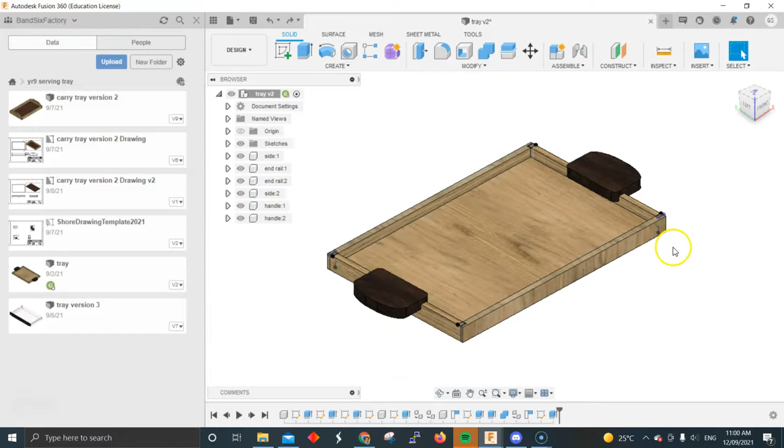We're going to end up making something like this in Fusion with a base, sides, and handles. So I'll start a new drawing here, so I'm going to close that one. I've actually made a few different versions here. We'll start out by creating a few different components.

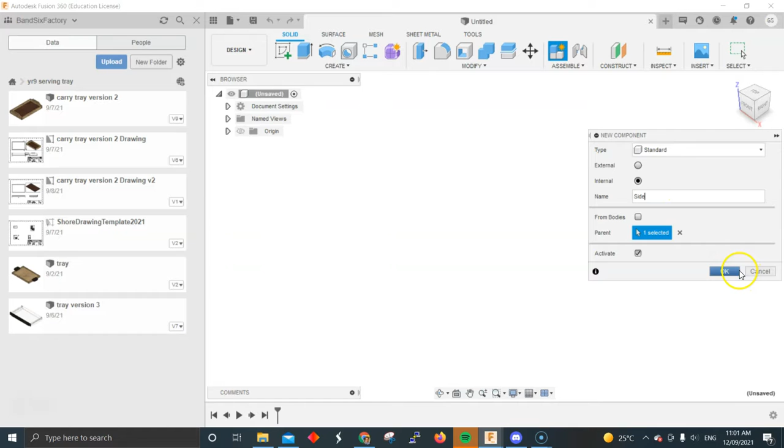So in here, let's create a new component to start off with, and we'll call this component 'side'. Okay, and go OK. So we've created a side piece. Then we can just start out by sketching it out. So I'll create a sketch on the front view here, and we know it's 480 long and 30 high.

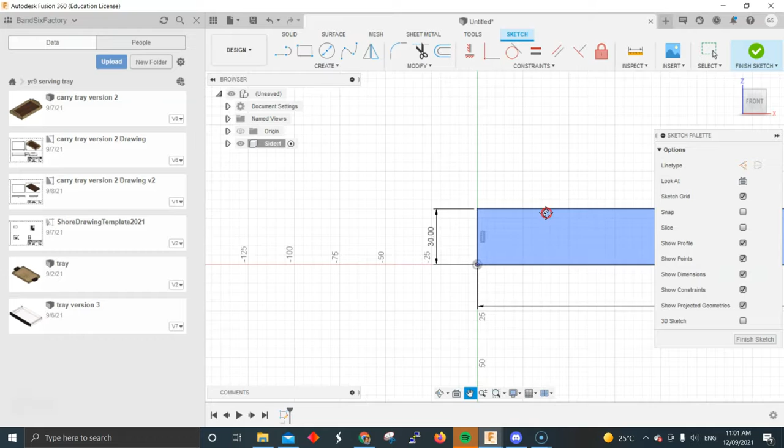So I can just type in 480 long and hit the tab button, 30 high, and press enter. That's the first part. Now what we need to do, we'll extrude that out by just clicking on finish sketch and going to the extrude button. We need to extrude it out by 12 millimeters, so we'll just type in 12 and then press enter. So we're starting to get to our first piece here.

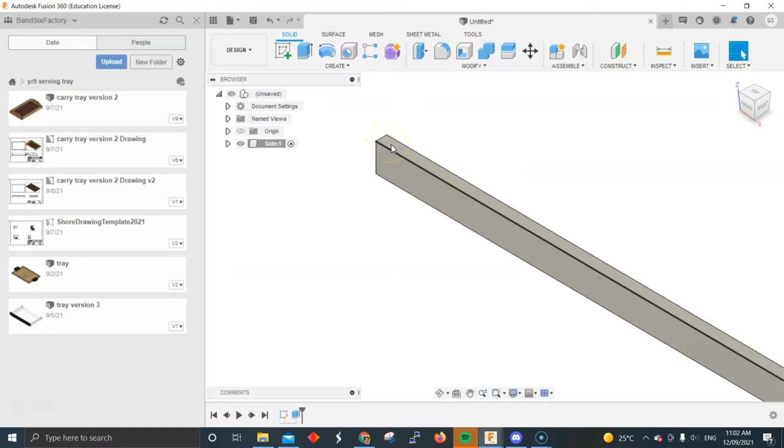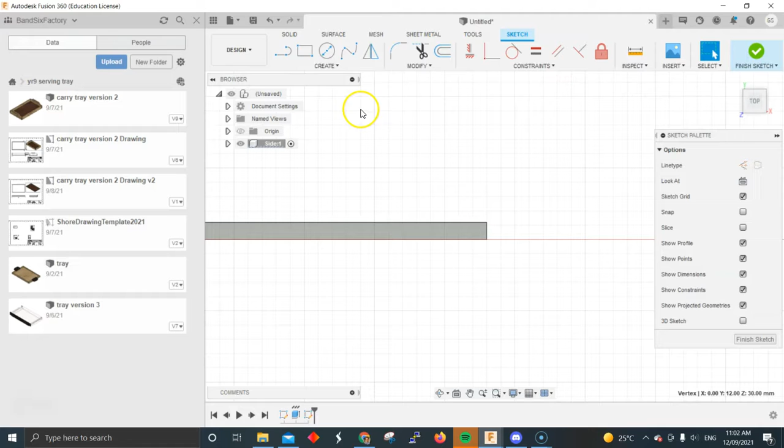So let's just have a look at this in isometric. Now what we need to do, we can create a new sketch on the top surface, and we can then do our rebate joints in there. I'm going to zoom in on one corner here and click on the corner, and we'll make that 12 millimeters by 6 millimeters deep, because we need to go halfway in. And we can do the same at the other end, so we'll click on that corner, 12 millimeters, tab, 6, and then press enter.

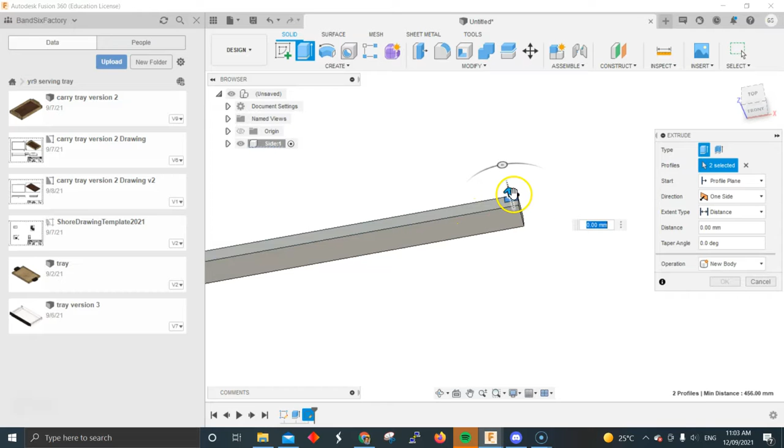We'll finish that sketch now and zoom out. What we can actually do, we'll rotate around so we can see it. I'm going to hit the extrude button, click on that one, and we'll click on that one there, and we'll drag it through to do a cut. So we've created our first piece here, which is good.

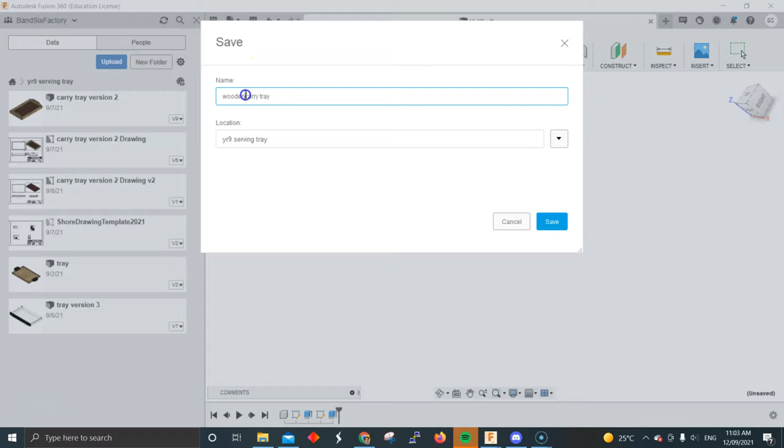Now let's go back into our top document here, into this top level. We can next save it. Let's just go into save and we'll click save. Let's just call this 'wooden carry tray'. We save it in our yr9 serving tray folder. So I've created a folder here, and we've got our first piece saved in.

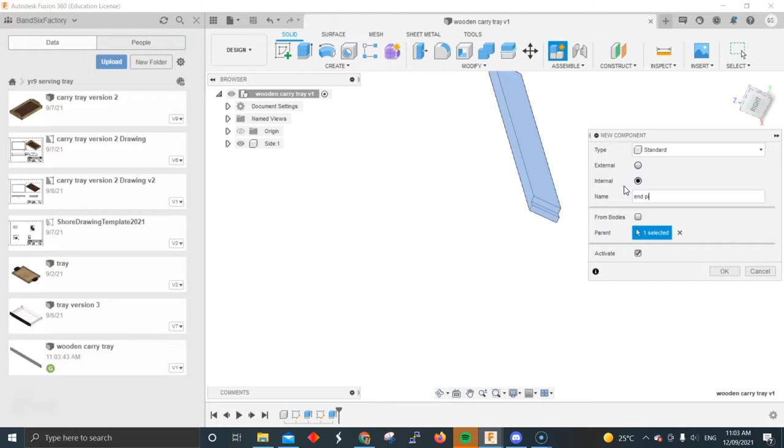Next thing, what we can do, we'll draw another sketch off that, create a new component, and create another sketch off that. So let's create a new component, and we'll tell it where to draw it from. Well actually first we'll call it the 'end piece'. Then it'll ask us where we want to start our sketch, so let's create a new sketch, and we'll do it on that face there.

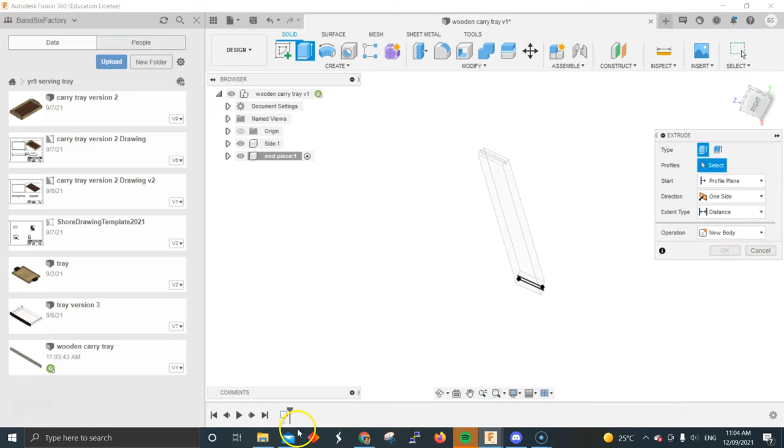We'll pick up the dimension, or pick up the drawing behind. So we know that's 12 by 30, and we can finish that sketch and extrude that out. We need to make that length - let's drop back into the drawing here, into the other sheet. So it needs to be, the end rail is 312 long. Okay, so minimize that, and we know that it's going to be 312.

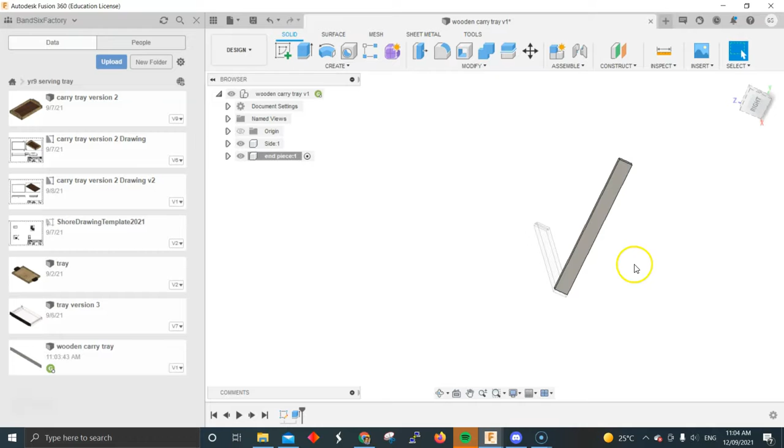So let's extrude that out by a distance. We're going to select it, extrude, typing 312, press enter. So that's our end piece, which is good. Okay, and now we'll press go back to the main drawing up the top here and go OK.

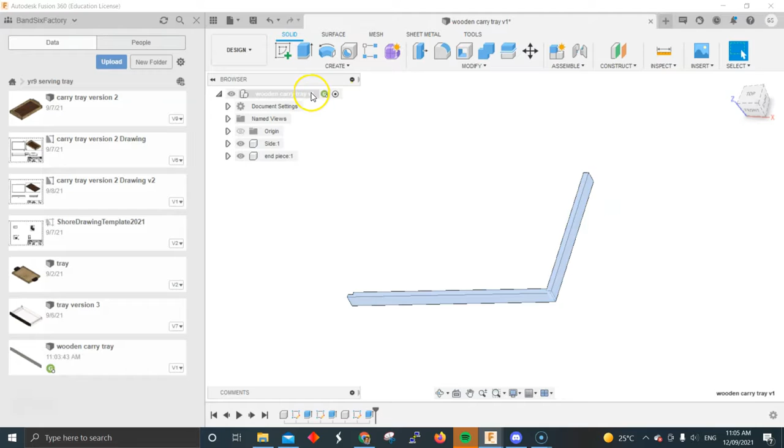Now what we can actually do, we need to copy these parts out. So let's first of all go into the end piece here and actually just click on edit. We'll copy that. Okay, and then knowing that we're in the top level here, we can then right click and we can actually paste new - you can't do a paste new.

If you're inside of this one here, it won't show up. You can't do a paste new, it won't allow you to do it inside of that. You have to go back up to the top one and then go down to paste new. So we paste a new one and we're going to drag that out.

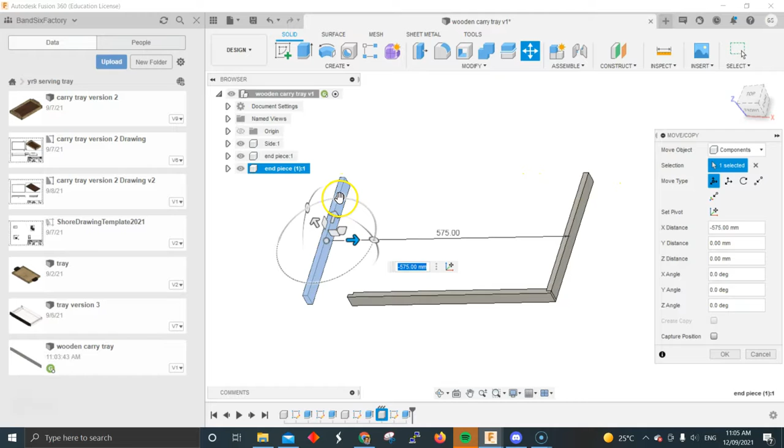But we have to rotate this, and there's a reason why, and you're going to learn about this later on. We'll rotate that around 180 degrees and just go OK. Then we're going to click on this one here, the side piece. So we're going to copy that, make sure in the top layer, and go paste new. We'll drag that one out and we're going to rotate that around 180 degrees

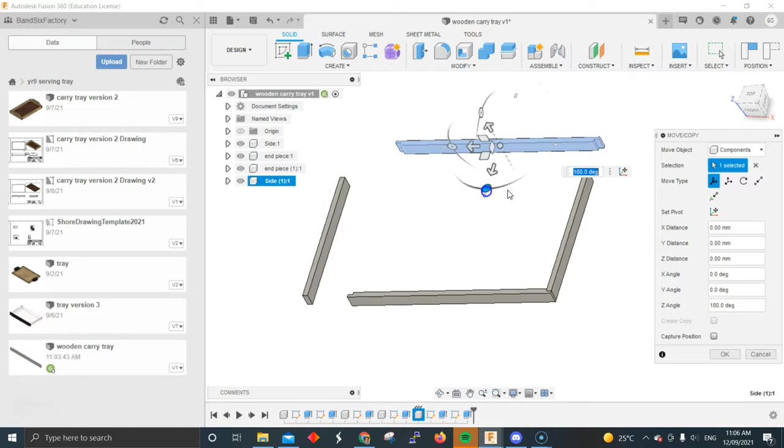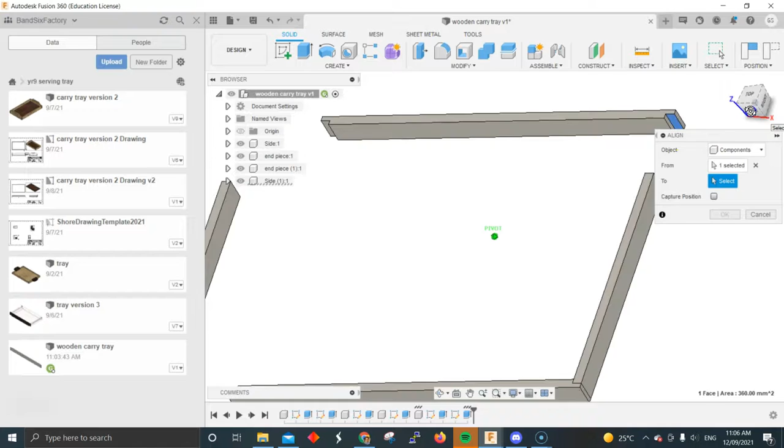And go OK. Now, next thing, what we want to do, we want to align them. There's a few different ways to get this to join together. So the easiest way is to use the align tool at the moment. We're just going to use the align tool and select, we want this surface to join onto. I'm just going to go around and we want it to join onto that end piece there. So let's just click on that and align that.

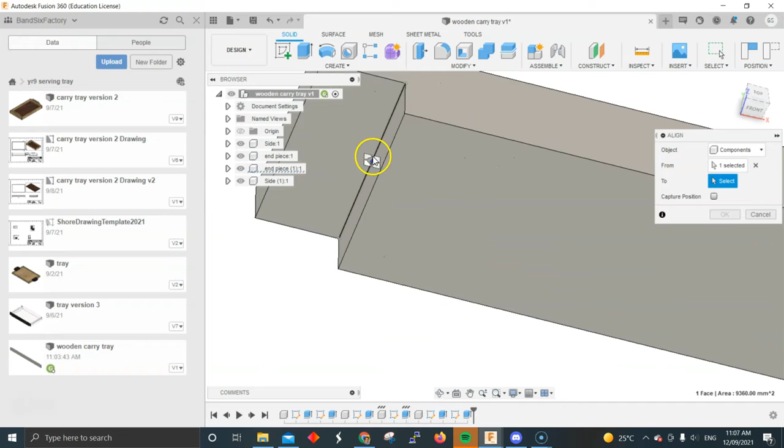Now the next one we want to do is align. We're going to go back up, modify, align again. We're going to click on this surface and we want it to join onto this end piece here, onto this area here. So we're just going to click on that. So we've joined that together and go OK. So that's pretty well sorted out.

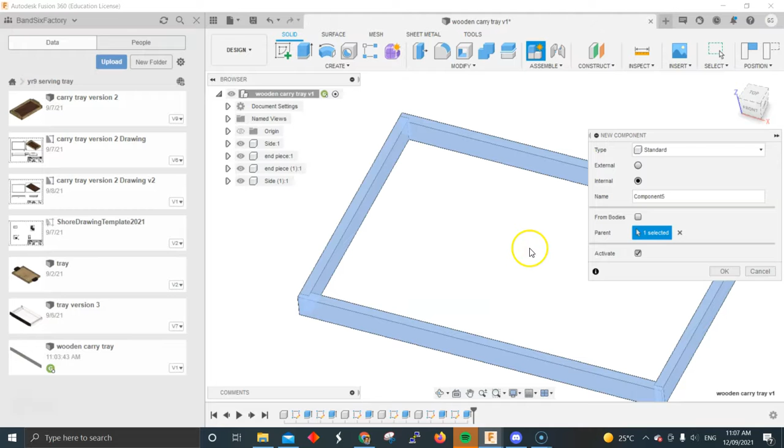Now, next thing, we want to create a base piece. So we've now got 4 independent pieces here. Okay, so we'll create a new document here. We're just going to go up and go create a new component, and we're going to go to the bottom of the tray here. So let's click around the bottom, and we're going to name that the base. Okay, and click OK. And we need to then create a sketch on the surface.

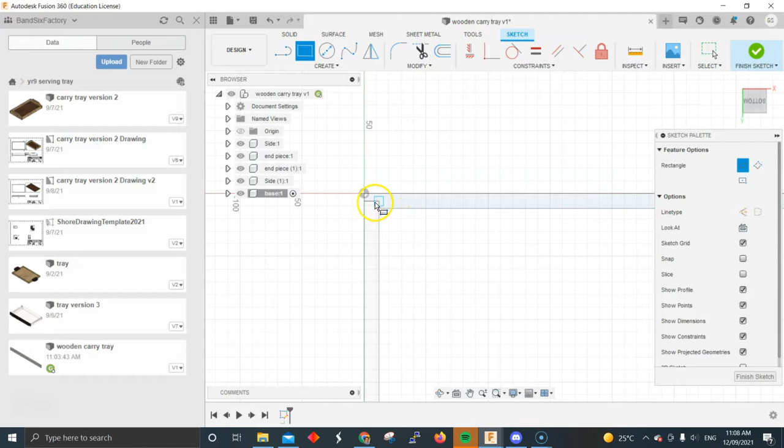So let's click on that edge, just there, and we're going to capture the position for that. Now, what we can do, we'll just draw a box around this. It should pick up the middle of that, which it has pretty well. We'll just drag it out to the other corner, and it comes up with that little triangle, which tells us it's in the middle of that. So that's constrained it pretty well there.

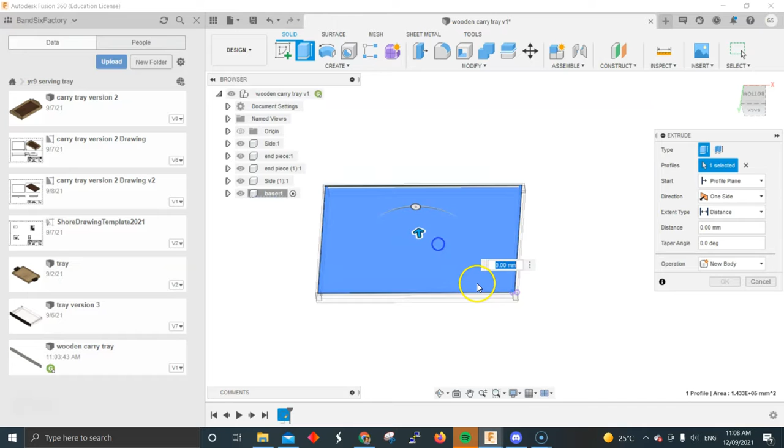Now we can finish that sketch and we'll extrude that out. Let's extrude that piece. Now we've got to make sure we collect all the pieces there. So let's just zoom in and make sure we've got all the area that we need to extrude out. We need to collect this little piece here as well. Okay, and that looks like it's going to cover all the area there. So just check that it's going over, because we're about to create a rebate into the next pieces here.

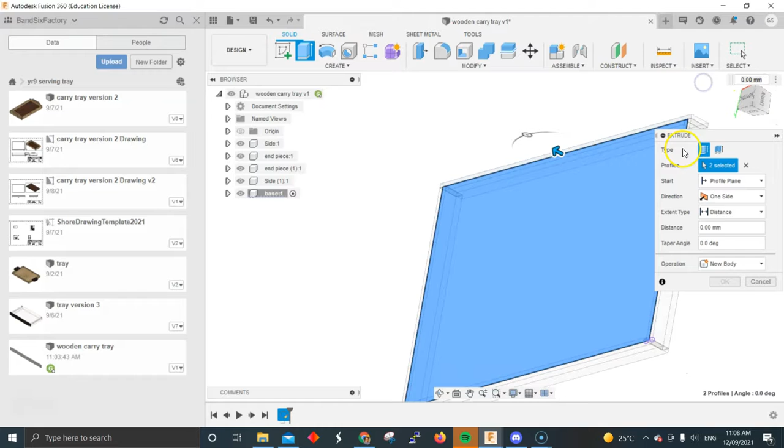So let's extrude that, and we're going to go in. We're going to extrude it in 12. We're going to go in minus 12 because the arrow is pointing the other way. So I'm going to type in minus 12 millimeters. And we've got our base piece now built.

Now that looks pretty good so far. So I'm just going to zoom out now and have a look at that as the whole. Now there's a little problem here because we haven't actually created the rebate, we've just made the pieces to fit. So if I hide the base, you'll see no rebate there at the moment. See, it's still all there.

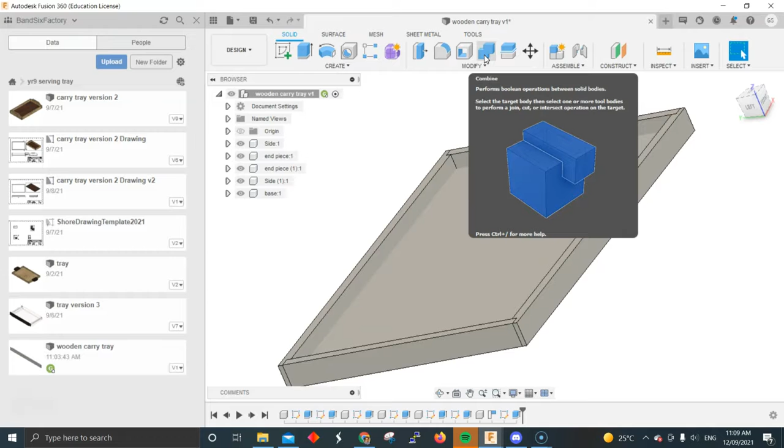So if I turn that back on, what we'll do is use the combine tool. So we'll just go up here and use combine. Clicking on the combine tool, our target body is, we'll make this the first one, the end piece here, and our tool bodies is going to be the base, and we're going to use it as a cut. We want to keep the tools, okay? So we're going to click on Keep Tools and go OK.

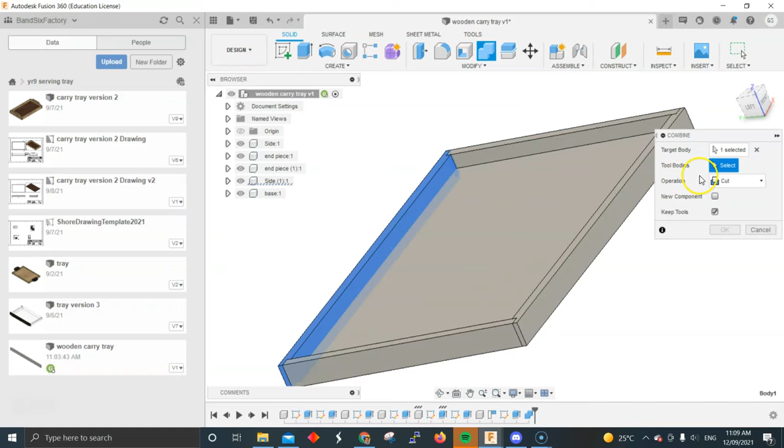Next one, we'll do the same thing, combine. Target body is the side. We're going to use the cut, and we need to use the tool body, is going to be the tool body there. Keep tools, OK. Next one, rotate round, combine. Let's click on that side piece there. Tool bodies is this piece here, and go OK.

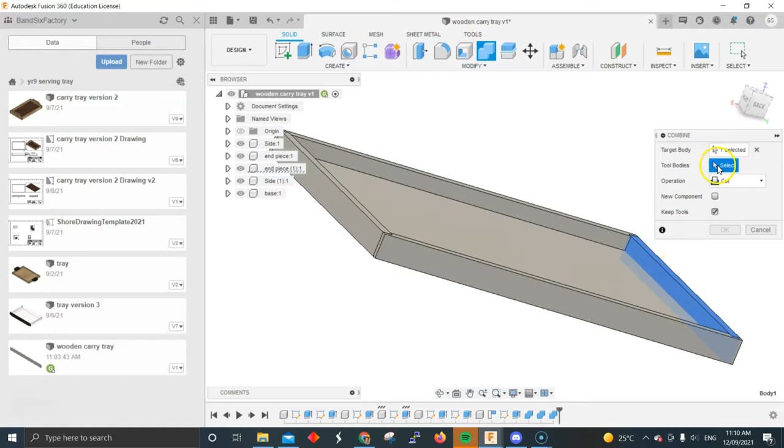Last piece around here is combine tool. Click on that piece as the target body. Tool bodies is this, and go OK. Now when I do it, you'll see a rebate appear. So if I turn that base off, you can see a nice little rebate, which is what we're going to have in here.

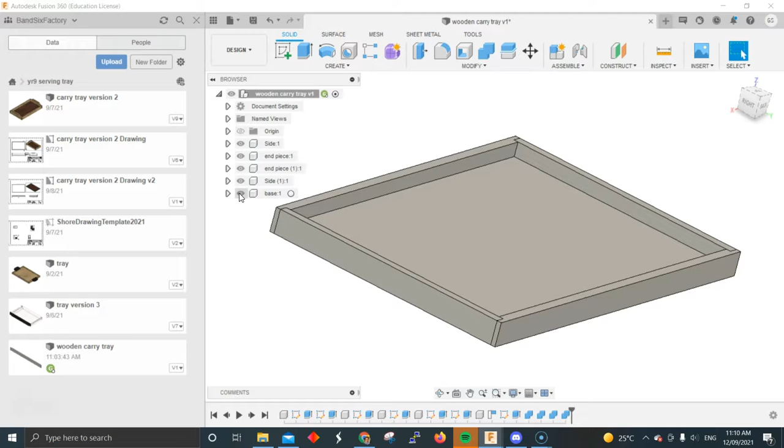Okay, so that's that done. So I'll just turn that back on. Okay, what I want you guys to do is just get up to that point, and I'm happy for this to be the lesson for today. We'll continue on with this drawing very shortly on the next video.